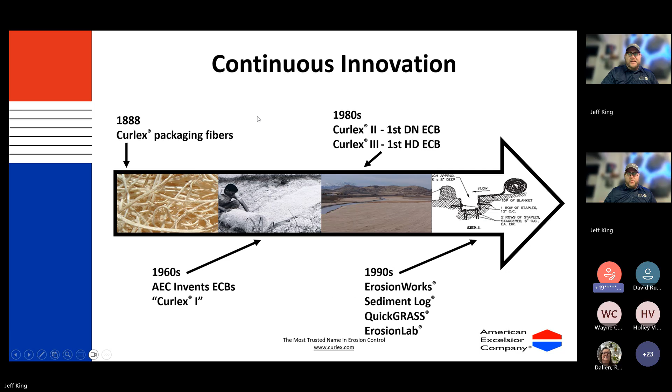Just a little bit about our company. Our company started in 1888. We were a packaging fiber company, the Curlex wood fiber. In the 1960s, we invented the first rolled erosion control blanket, Curlex 1. I'm not going to go over every one of these, but we did invent the first double net erosion control blanket in the 1980s, and the first heavy duty one. And then most recently, we rolled out a TriNet family of TRMs as well as a high visibility log.

We have locations. Our corporate office is located out of Arlington, Texas, and then we manufacture a full line of straw products as well as wood products, the Curlex wood fiber. Those are manufactured in Rice Lake, Wisconsin. And then we have, and those are the Green Stars.

And then the Green Star in Ohio and Alabama, that is where all of our straw-based products are made, so like single net straw, double net, straw coconut, things like that.

The reason why I wanted to mention this is because I've done the fiber type presentation before, but when we're talking about the evaluation of the fiber types and how they perform, I'm coming at this from an angle of we actually manufacture all of this type of stuff. So I'm not just going to sit here and say one is better because I don't have access to or manufacture the others. These are factual things based on the performance of the fiber. So I just wanted to make sure I point that out.

We do have the only large-scale testing. We're the only manufacturer, I believe, in North America that has a large-scale ASTM testing facility up in Rice Lake, Wisconsin. We can do channel and slope analysis as well as some other sediment device things up there as well.

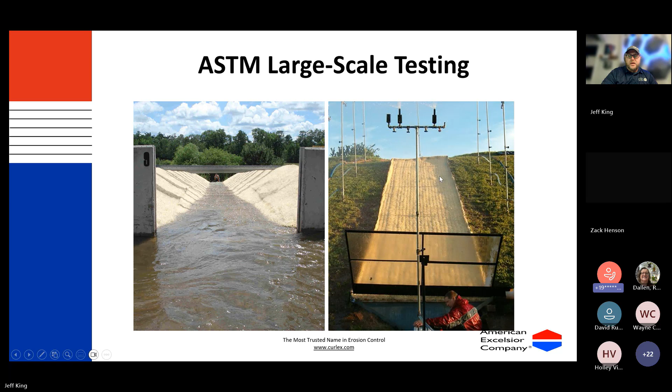Just to give you an idea of what some of the large-scale testing looks like, over here on the left is large-scale testing in one of our flumes, and then we've got rainfall testing over here on the right with the risers and an Excelsior blanket there. We've hosted visitors from 35 different countries from around the world at different events up there at the lab.

Just like other manufacturers, we have tools that can make your job easier if you're a designer or if you're an inspector and you want to make sure that the BMPs have been installed properly. We have a technical support library that's going to have the specifications, CAD details, what the staple patterns are, things like that. We have a YouTube channel that's going to have different videos. Some of the videos you'll see in these presentations are on the YouTube channel.

We also have a design software that will do free rainfall and channel erosion analysis. And inside that software, it's going to have a lot of the things that are in our technical library, like these CAD details and things like that. We want to make your job a little bit easier.

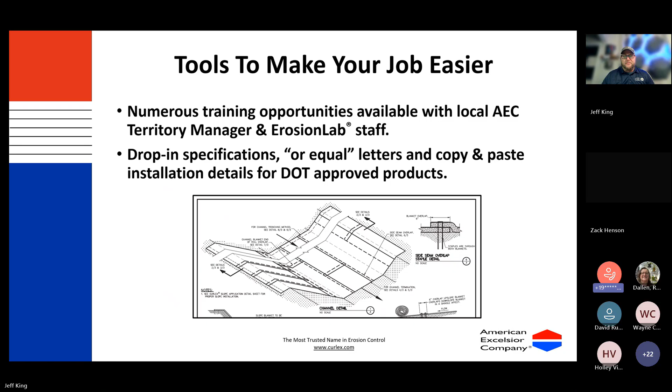So we offer numerous training opportunities, and we're fortunate enough to be able to work with organizations like COSWA, the IECA, and then we also do our own thing as well out in the different markets, whether that be with me, the territory manager, or we have some roadshow things where we'll bring some of our staff from the erosion lab down. We offer or-equal letters and then copy and paste installation details for your DOT-approved products.

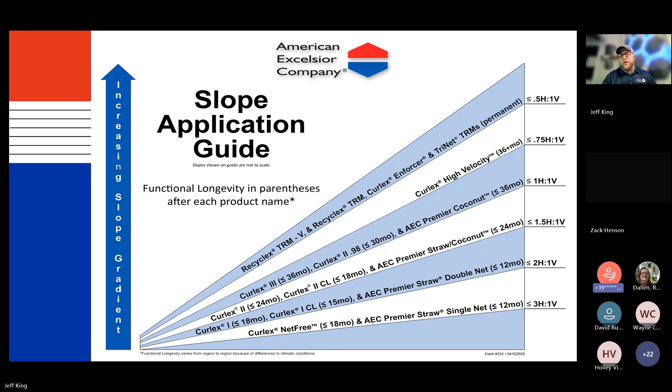One of the resources that we offer is a slope application guide, because when you're looking at a project, two of the things that you need to consider are, one, how long you want the product to last, and two, what the slope gradient is, so how steep the slope is. Other manufacturers will have similar documents where they'll have their products based on product longevity as well as the slope gradient like you see here. And we'll do that for both channels and slopes.

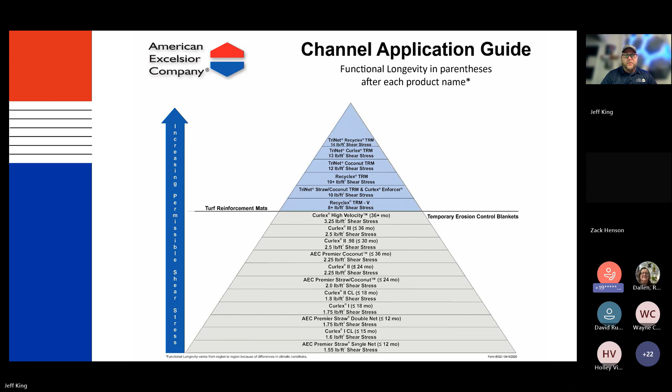The channels are going to look a little bit different because those are going to be based off of longevity and then what your shear stress requirements are. You'll see here at the bottom, you've got a single net straw product that's like 12 months longevity and can only do 1.55 pounds of shear stress. And then up towards the top is where your synthetic products are going to be, where those are going to be permanent longevity with like 14 pounds of shear stress per square foot.

So now we'll get into the project, the Pikeview Quarry, and some of the history of this project. It's located in the Rocky Mountains just outside of Colorado Springs. It began operations around 1903, and then they closed it in 2018. So after 115 years of service, they closed it down. An interesting thing is they actually supplied half of the limestone to build the city, plus the limestone for the concrete used to construct the nearby United States Air Force Academy.

The nickname a lot of the locals gave this area is the Scar, because the mountain is scarred, as it was before the reclamation project. Since closing, one of the big priorities of the owner is stabilizing the slopes and then revegetating the landscape. I actually got to sit in. I wasn't on the roundtable because they didn't have the manufacturers, but last week I was at an event in Pueblo, Colorado, and they had the project owner.

They had two contractors that worked on the project, and they had the Colorado Department of Natural Resources Mining Division person there, as well as the representative from the city of Colorado Springs, and then the distributor that actually worked hand in hand with all the parties involved to get the project designed and going.

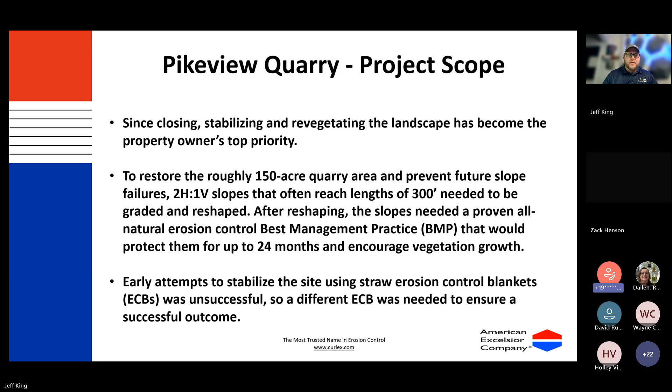Early attempts to stabilize the site, they tried to use straw erosion control blankets, and that was unsuccessful. So what they realized was they needed to try a different approach and a different erosion control blanket to get that successful outcome. The fiber that they ultimately ended up using was the Curlex wood fiber. One of the benefits of it is it's naturally seed-free. Unfortunately, straw can contain weed seeds.

Curlex wood fibers are going to expand when they get wet, and I'll be able to show you an example of that. And they conform to the soil irregularities. One of the great benefits of the aspen wood fiber in general is it holds its weight in moisture. So when it gets wet, it'll provide this greenhouse effect, which is going to help protect your seed bed as well as hasten your vegetation.

Straw is essentially a flat and hollow fiber. It's an agricultural byproduct. So it's a non-engineered fiber compared to different wood fibers. And these fibers, specifically for the Curlex blanket, are cut to be a certain size to meet that optimal performance. As mentioned, straw is an agricultural byproduct.

So the plan. What they planned on using was a combination of drill seeding, some biotic soil media, and fertilizer to revitalize that quarry and help aid in the vegetation growth on the slopes. What they ended up using was over 422,000 square yards of the Curlex double net Excelsior blanket with jute netting.

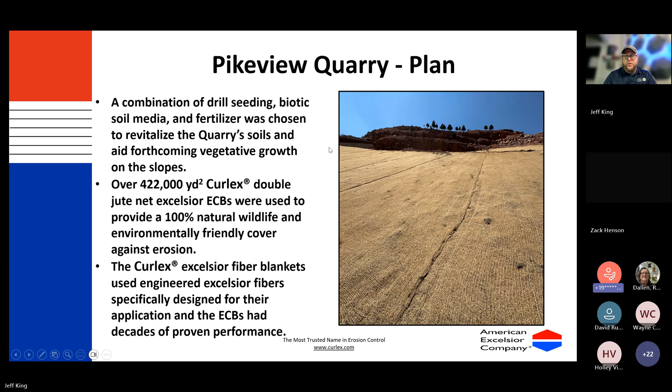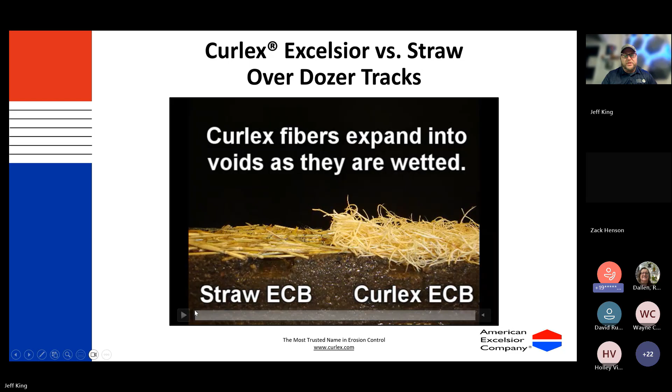We get both wet, and you'll see here, as the time-lapse video shows, the Excelsior fiber blanket actually expands down into that track void. So there's no weak spot underneath that particular fiber. Whereas the straw fiber, when it gets wet, doesn't retain moisture like that, so it just stays flat and hollow. So you still have that void underneath the blanket.

And this is actually one of our flumes. We have our straw blanket installed to manufacturer's recommendations as far as staple patterns, amount of staples, those kind of things. And it's going to show you a comparison of running water down this flume with the straw blanket installed to those recommendations, as well as the Excelsior blanket installed to manufacturer's recommendations as well.

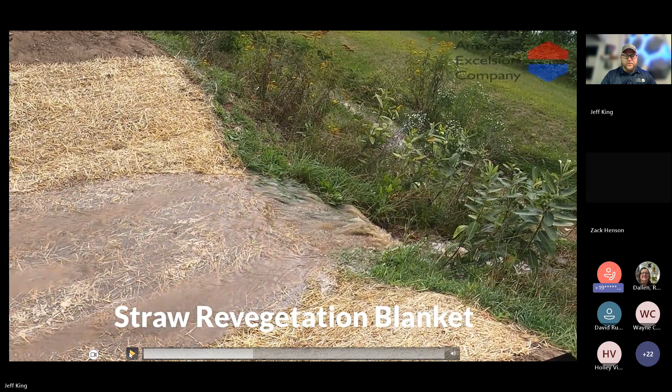So what you'll see here is the water coming down the flume. Those fibers, because they're flat and hollow, rise up. And because they're rising up, your blanket doesn't have that intimate contact with the soil. So you're having erosion underneath your blanket in this particular application. And because of that, you'll see that the runoff here is actually brown. And that's obviously not a result that we want, right?

Oh, let me go back. Sorry.

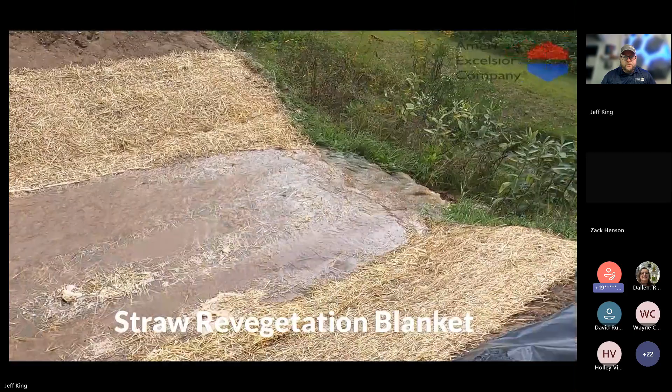Now you'll see the same water at the same flow rate going over the Excelsior blanket. This blanket, when it gets wet, these fibers curl and interlock with one another, and then they Velcro down to the soil.

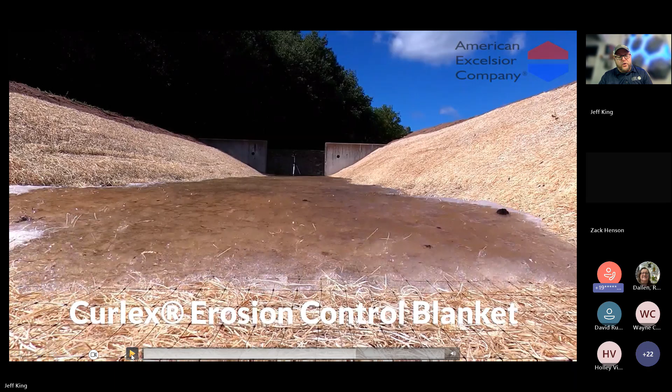In other presentations, you've heard me talk about specific gravity. From a value standpoint, anything with a specific gravity under 1 means it will float. So that can be straw fibers, some wood fibers, poly-based fibers for your TRMs, those kind of things. This is actually not floating, not because it has a specific gravity over 1, but because of the mechanical function of the actual fiber type and it Velcroing down to the soil. And because it's not floating, you can see a difference in the runoff. It's actually crystal clear.

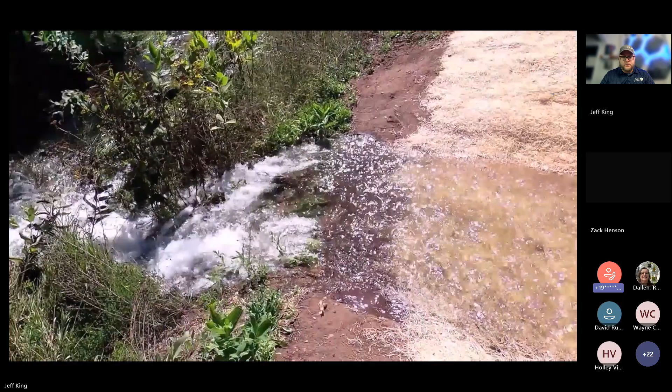And that's the kind of result that you want. Not all Excelsior is going to be created equal. There are Excelsior blankets that are made with different fiber types other than the aspen wood fiber. The benefit of the aspen wood fiber is that expansion that I showed you earlier. It will puff up, it'll expand and contract and give you that higher Manning's N or roughness.

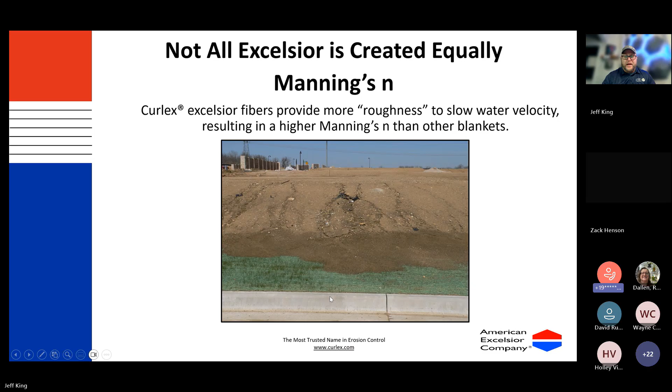And what that allows it to do also is if you have sheet flow, you can see here, like this particular site here, they had a rain event, you've got your rills here and you've got a lot of sediment starting to run down, but because of the roughness factor of that blanket, it actually traps the sediment about halfway in rather than going down out into the street.

I mentioned the biodegradable netting. So standard erosion blankets like ECBs, ours and other manufacturers included, typically come with a polypropylene plastic netting. For this particular project, they wanted to go with a biodegradable option. And a lot of areas are actually starting to choose that over the plastic net options anyway, just due to microplastics becoming more and more of an issue, things like that. So all of the manufacturers are going to have a biodegradable net option.

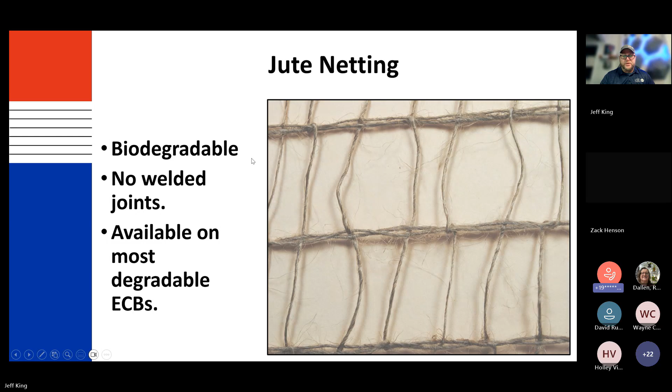It does have a cotton stitching. So these blankets are what we call stitch bonded. For an erosion blanket, it can be for either a single or a double net, and this one was actually a double net. So what that means is you have your netting on top, then you have your fiber matrix, then you have your stitching that goes through the blanket, kind of helps hold everything together, and then you have another layer of netting that goes on the bottom. So that's what we call stitch bonded.

And in order for a blanket to be considered 100% biodegradable, every component of that blanket needs to be biodegradable, and that includes the stitching. These blankets actually have a cotton stitching, which is biodegradable. So you have your netting that's biodegradable, you have your fiber matrix that's biodegradable, and then you have your stitching that's biodegradable as well.

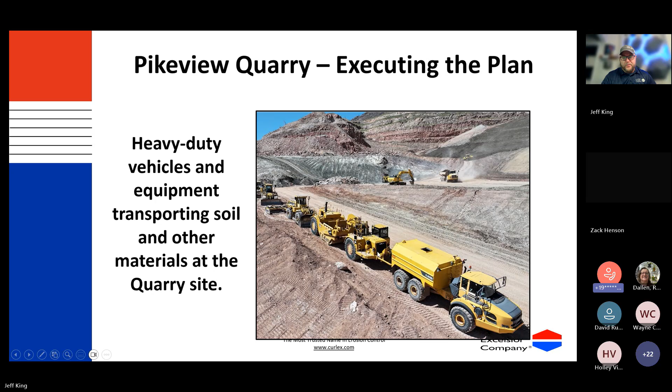Executing the plan, they had to use a ton of heavy-duty vehicles and equipment transporting a lot of soil that they actually brought in from other places. In fact, the owner was talking last week about how they allowed other construction sites to bring their fill dirt and just dump it there because they knew they were going to have to use it. So this is a look at just some of the heavy equipment that was used on this project.

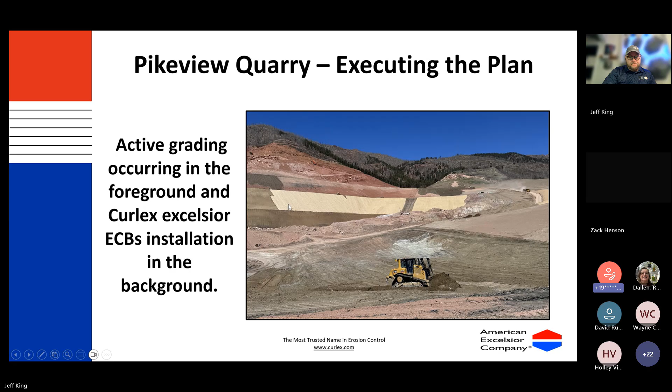And I will also point out, I don't believe they had any safety issues or incidents the entire time they were installing these products, ours and others on this project, because they were pretty dialed in on making sure that their crews were safe and were able to install this in a timely manner, but being safe while doing it. These were 16-foot rolls that they used, and they used skid steers.

And then here's the result. This is the view of the Quarry site once all of the erosion control blankets were installed and it had been completed. And like I said, they tried a year before this to use a straw-based product, and they didn't have any luck with the vegetation. And you can see here, this hadn't been installed. I think from the time they started the installation on this to when they finished, I don't think it was more than a couple months.

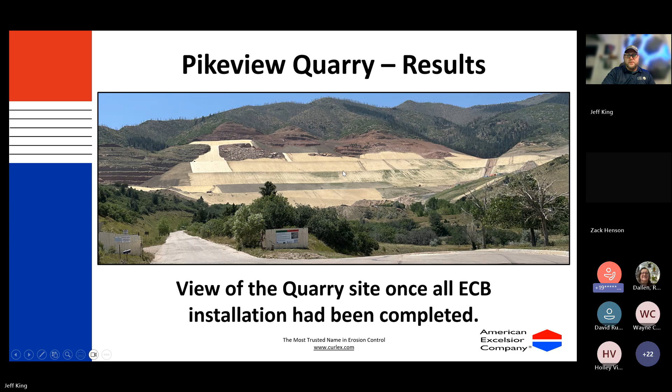Establishing vegetation in Colorado is going to be a lot different than establishing vegetation in Oklahoma or Texas, right? Like, it's not going to be as fast just because of the humidity we have here versus they have an arid environment there. So this vegetation they started establishing inside of just a couple months, and it's starting to grow. More emerging vegetation. I mean, gosh, just look at the scope though. So you see the guy over here on the left, and how he looks like an ant compared to the size of this slope.

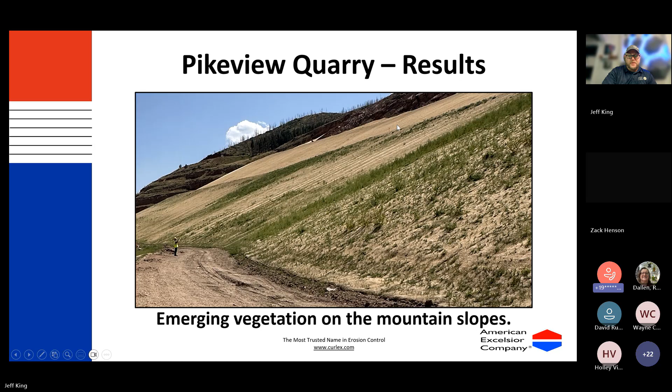There were actually pronghorns that were on site as well, and other types of wildlife. And that's why that netting actually being the biodegradable option was important. So, again, we didn't have animal entanglements because also, I'll point out, this was a very high profile project. They were doing news stories about this both before and during the project. And so there was a lot of community feedback and things like that on it. So obviously, if you're an owner of a project, you don't want wildlife entanglement anyway, but you certainly don't want wildlife entanglement and then being on the news for it. So that was the other reason why they chose the biodegradable option on that netting as well.

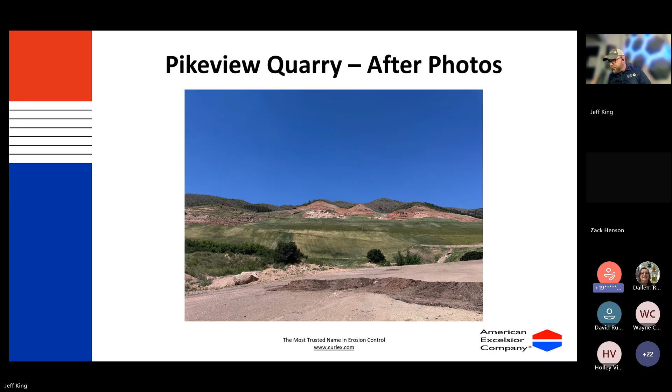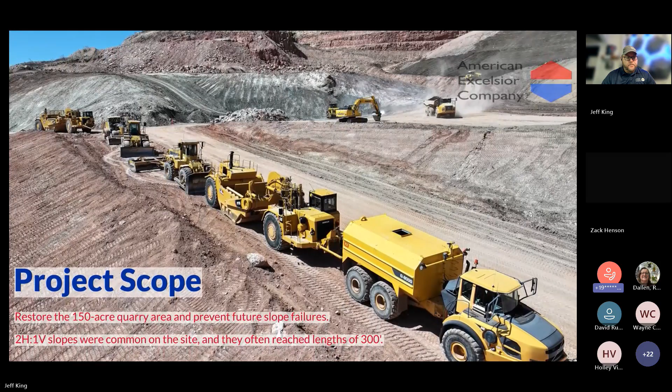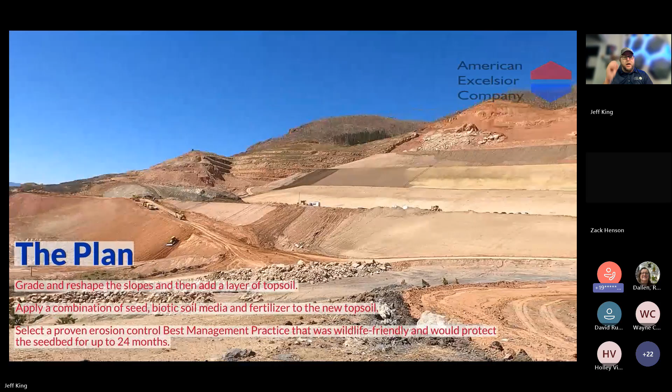Kind of recapping some of what we've already gone over. Yeah, I'll also say this is the biggest project that I've ever been a part of, as far as that goes. I've never done one that's had that many yards of any kind of ECB put on it. And I've done some pipeline projects, but this one I think has got to be the biggest one I've ever done.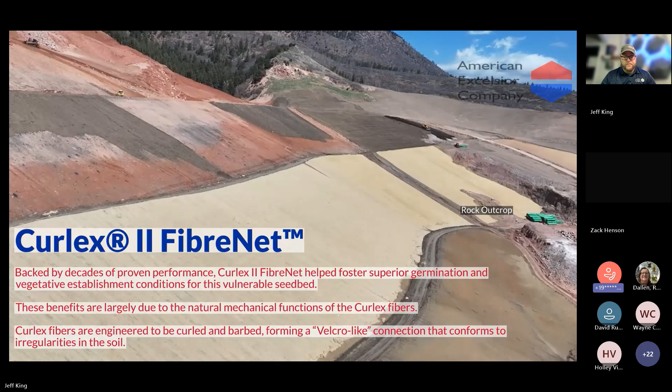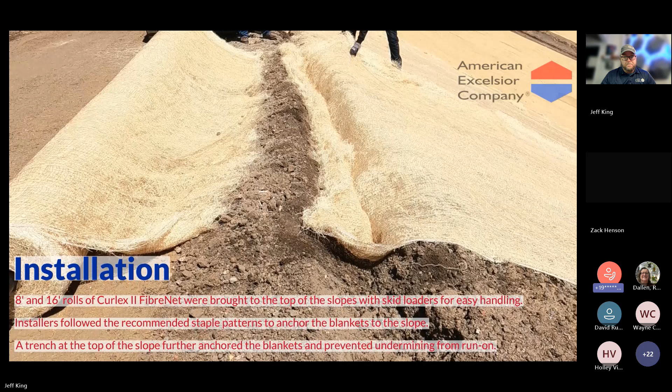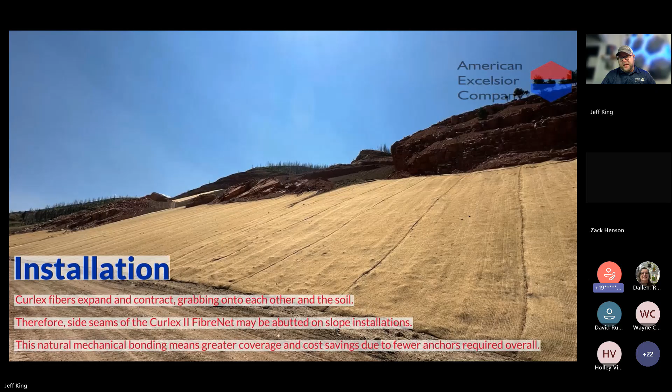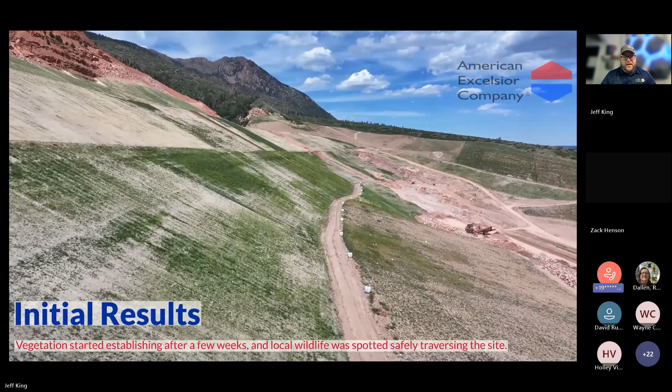Give you an up close look of what the installation looks like with the trenching and things like that. Other thing I'll also note, the Aspen Excelsior blankets, you do not have to overlap. So you can see these are butted up against each other because, again, when they get wet, those fibers will interlock with one another. And this is just a drone footage look of the initial results of that vegetation starting to come in.

Installation tips for really any project. You want to make sure you have good soil conditions. You want to prepare the area that you are actually installing the ECB on. So you want to remove any kind of rocks, clods, or any kind of big sticks or roots or anything like that. You want to make sure that soil is as flat as possible. You want to also use the right seed mix too, right? You want to use the optimal seed mix for whatever your area is and whatever your native seed blends are. You want to also select the right soil amendments depending on what your conditions are.

And something I'll also point out, the reason this project succeeded wasn't just because of the blanket. There actually was a biotic soil media that was used that was crucial to making sure that we can actually get vegetation. Because the vegetation, that's the whole point, right? That's why you do these types of projects, because you want to revegetate and stabilize. And honestly, I don't believe that it could have been done in as efficient of a manner without that soil media. So I wanted to make sure I point that out.

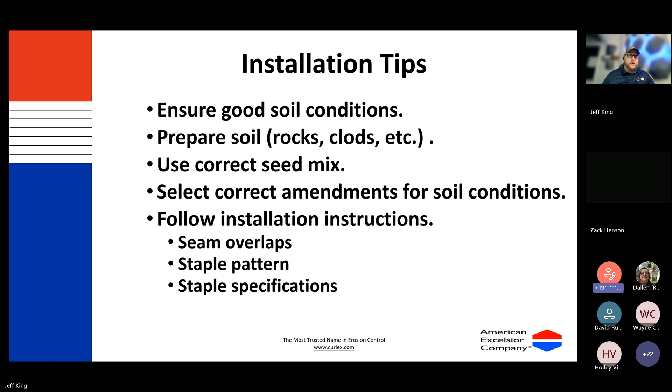Staple specifications. Some require a different gauge metal, or a different length, or for certain turf reinforcement mats, instead of using a U-shaped sod pin, you might want to use a helical twist pin. And if you use that, you want to use the right one for the right type of soil, whether you've got a cohesive soil or fairly loose soil.

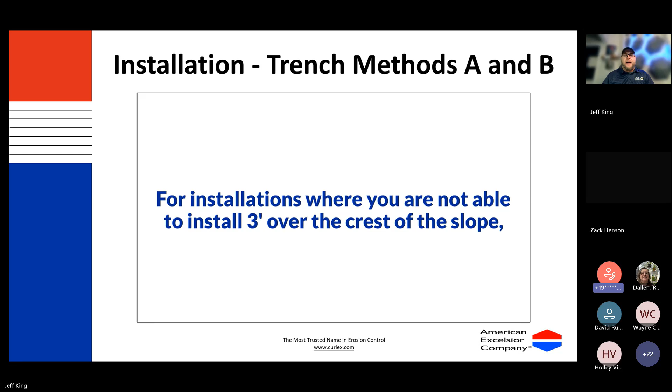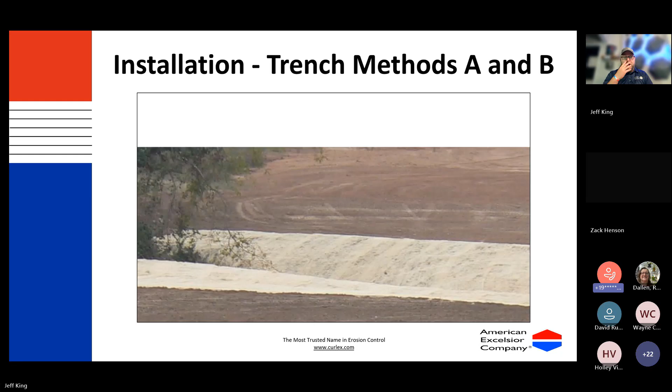You want to make sure you do your trenching at the tops of your slopes. This gives you an idea what it looks like to install one of these types of products. You really want to be at least 3 feet over the top of the slope. Yep, and make sure you use your trenching. Again, till and rake the soil as needed. Make sure you remove large obstructions. Make sure you've already added your seed and then your soil amendments. And we'll look at trench method A.

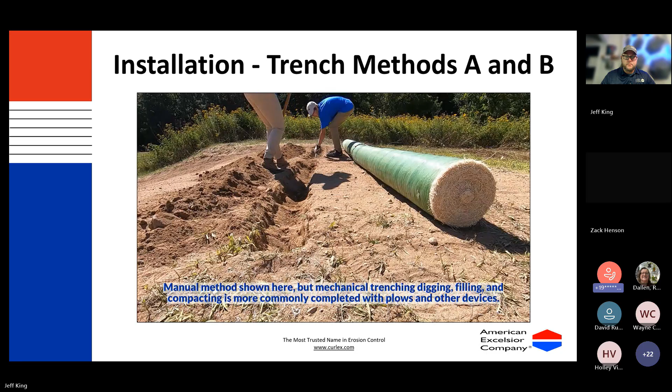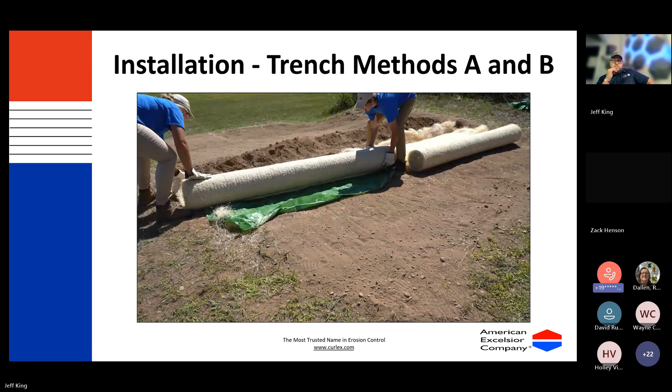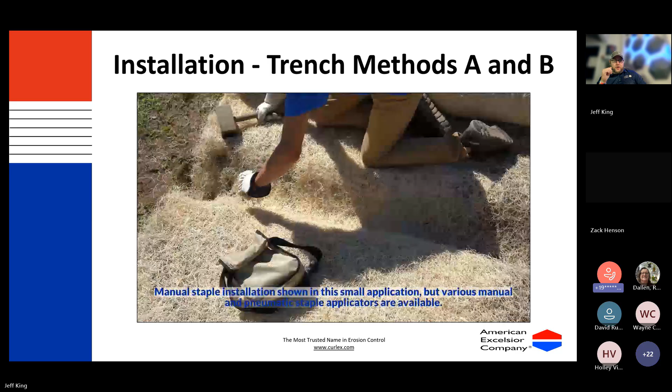So you want to make sure you place the soil down slope. You can also use mechanical methods for trenching as well. You want to pull the flap under the roll and place it in the trench, and then set the remaining roll on the other side. And again, if it's a single net product, make sure that netting is going to be on top. And then you'll staple. You want to make sure you put a good amount of staples in your trench.

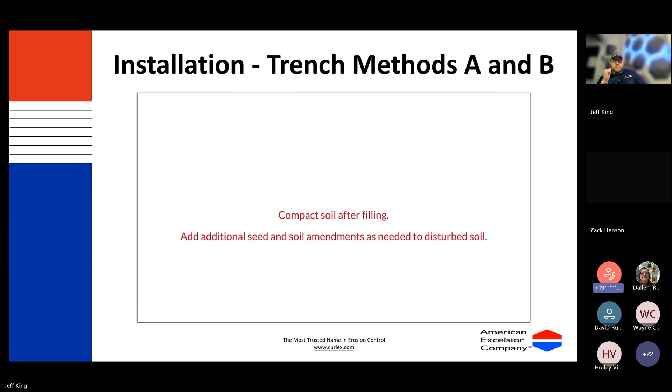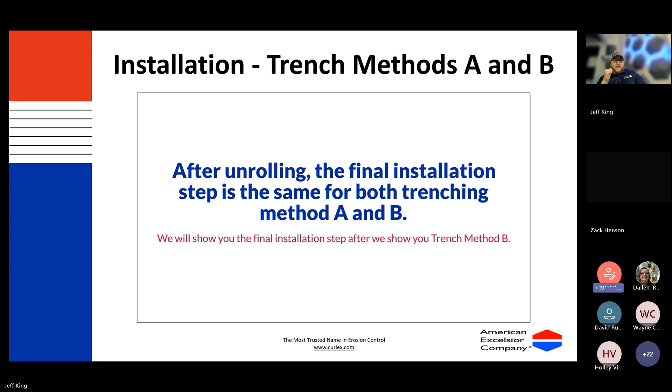And then you'll soil fill that, and then just pack that down if you can. And then you're going to unroll your blanket. See how clean that looks at the top already? That just looks clean. Yeah, and the final installation step is the same trenching and stapling method. And then you've got trench method B.

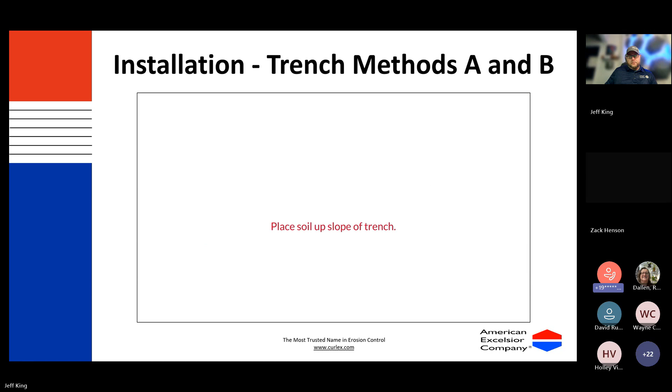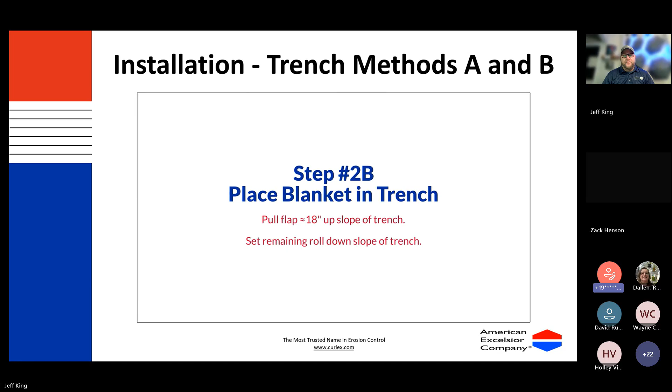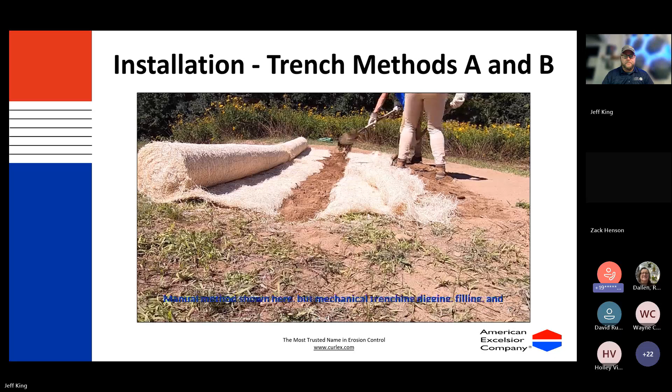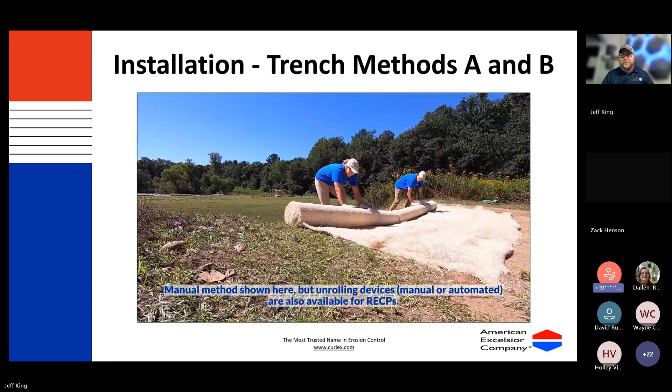Pull the flap 18 inches up slope of the trench. Then you'll push it down in here. And again, make sure you add a good amount of staples, so that it stays nice and snug in there. You'll soil fill it. Then you'll see here they pulled that extra section back over the top of the slope, and then they will have stapled that down as well.

Again, I can't stress how important it is to follow the staple pattern and the installation guidelines when installing this BMP or any other BMP for that matter. And I guess I went a little fast on that one. Anybody have any questions or anything you wanted to point out from what you saw?

Right. So Wayne had a couple of questions. He wanted to know if all the plants used in that case study were native. Yeah, they would have definitely been native. And then he asks, what is the biotic soil mix? Was compost a part of that? I'm not entirely sure on the exact components of it, but it was a Profile product for sure. I'm not sure what their mix consists of, but I do know that they did use their, I believe it's called Biotic Earth. Okay, cool. Thanks. So that's all our questions this time.

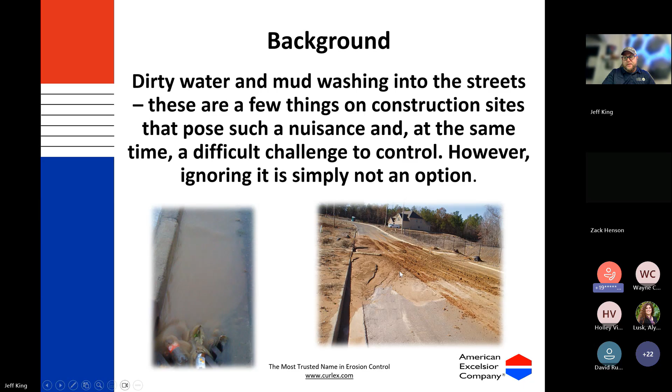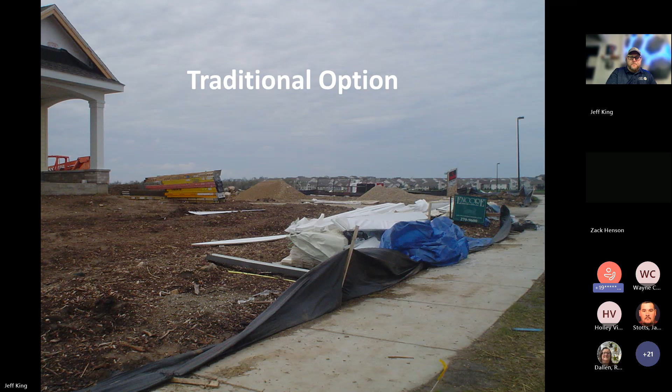So here are two examples. You've got sediment-laden water here and debris going towards a storm drain. You got a ton of sediment out in the street. Obviously, you cannot have that. So the traditional option to try to control that is the silt fence, whether it be plain silt fence or wireback silt fence, depending on what your requirements are. Some of the different things you'll see in the field when silt fence is used. It's a damming device. It gives you that kind of result.

Unfortunately, this is something that we've all seen out in the field. How this happens is you have trades that come on and off of these job sites, right? Whether it's the electrical, the plumbing, or the bricklayers or whatever. I'm speaking in terms of housing construction, and they don't think about clean water or SWPPP plans or anything like that. So they run over the silt fence, and this is the type of thing that you get on these sites. You see here on top, you've got the sediment on top. You have more in the street, so that's going to be going into the storm drain.

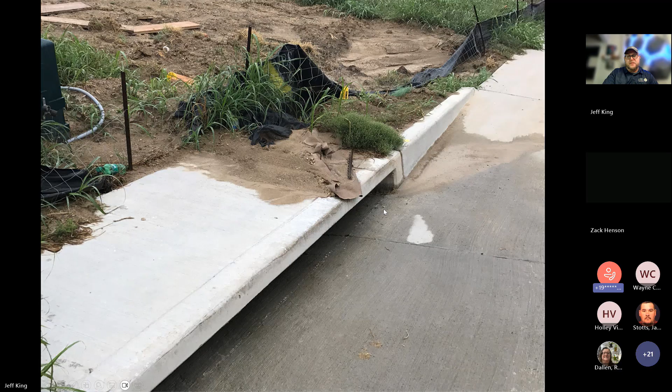So I'm going to show you the innovative option for controlling your site sediment. This is called Curlex Silt Trap. It gives you an idea of what a site looks like with and without Silt Trap. On the left, your streets are clean. That green looks really pretty. But on the other side, you've got sediment running out into the streets, which is going to be running into the storm drains. It's just not a good look.

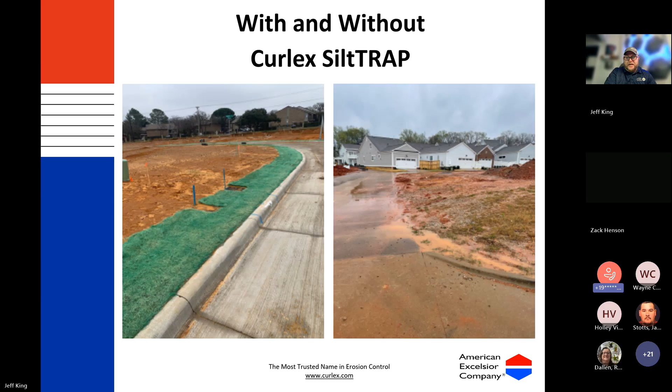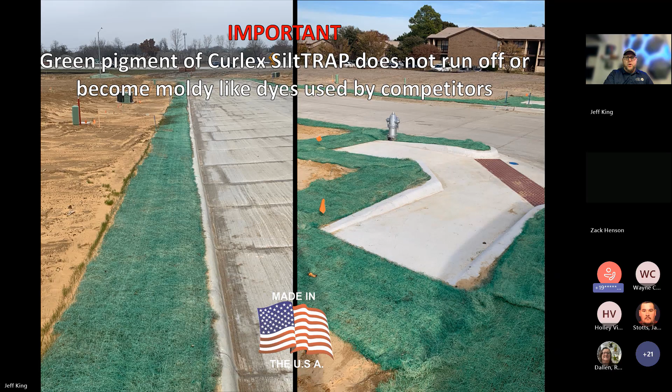One of the things that's great about this is it's a low profile device. It does have a high performance capability, and that green, as I mentioned, looks really good on your job site. So what this will allow you to do is have the performance, stay in compliance, and avoid those fines. And it typically will save you money compared to a lot of the traditional options for sediment control. We use a green pigment, and it does not run off or become moldy like some dyes can do.

Just to show you what it looks like. It's aesthetically pleasing. That green, like I said, looks good. Gives you that grass look.

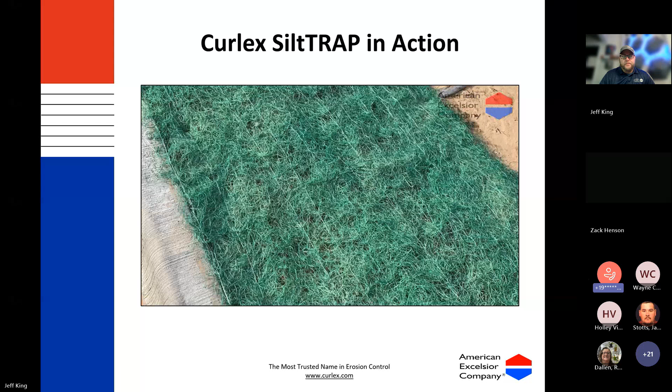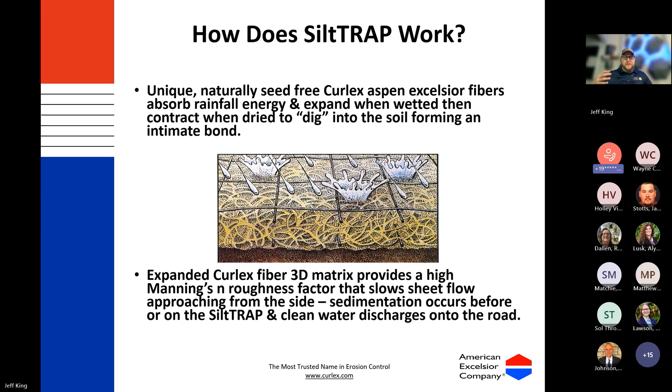So how does it work? Well, one, these fibers are naturally seed-free. They're Curlex aspen wood fibers. They help absorb that rainfall energy. And as I showed you in that video over the track void, and you'll see a couple of the same videos in this one, the fibers will puff up and expand when they're wet, and they'll contract when they're dry and dig into the soil. And that 3D fiber matrix gives you a higher roughness factor that's going to slow down that sheet flow approaching from the side.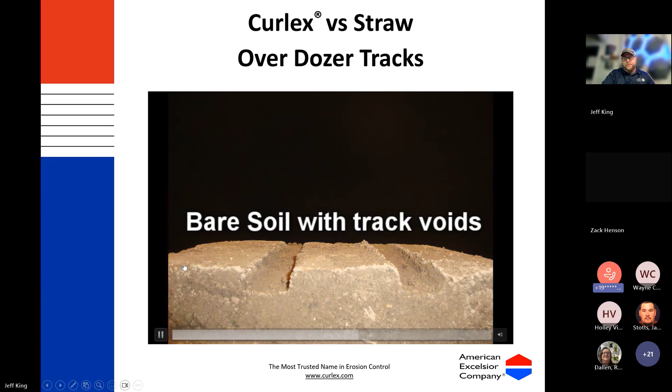So you can see how it got wet and expanded down in that track void. We already saw that, so we won't spend a lot of time on that. Again, it gives you that roughness, and roughness is going to equal performance.

They used an 8-foot buffer strip here, but you can see they had a rainfall event. The fibers got wet and expanded, and then the sedimentation started moving off the site, and it was trapped about a third of the way into the blanket, which is what you want. Because what that's going to do is minimize callbacks where you have to have your contractors come out and sweep and clean up.

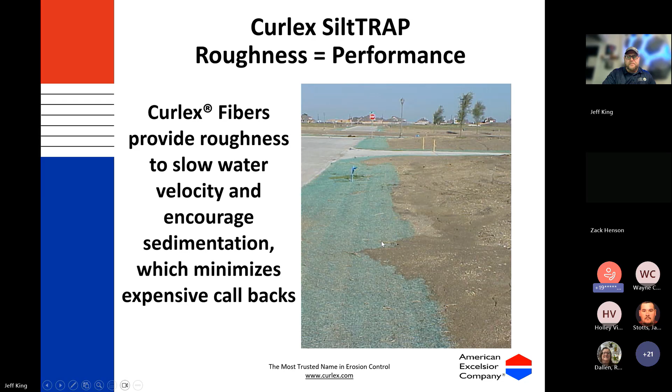It will filter out contaminants from anything from sediment to heavy metals. It will filter out hydrocarbons. And that fiber is actually recognized as a sorbent by the EPA.

This is one of my favorite videos. It's on our YouTube channel. We started making this kind of video around the time of the BP oil spill out in the Gulf of Mexico. I believe that was in the early 2010s, somewhere around there.

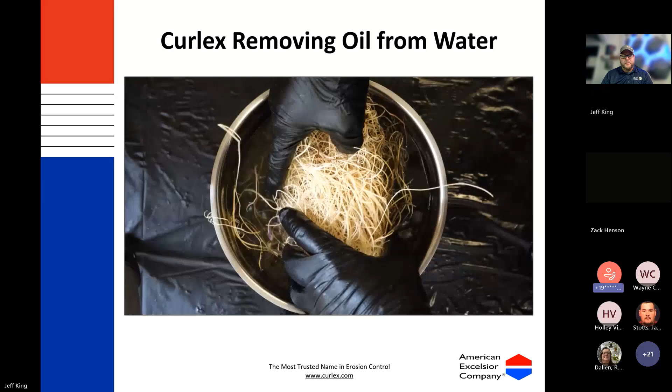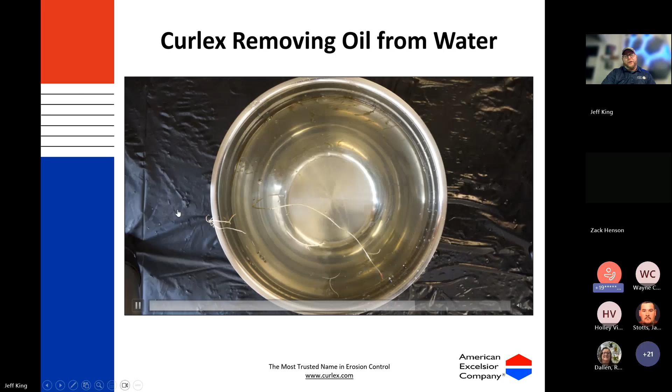You can see here that fiber pulled that oil out of that water. Our straw fiber will not do that. Our straw coconut or our coconut fibers will not do that. Only the aspen wood fiber will do that.

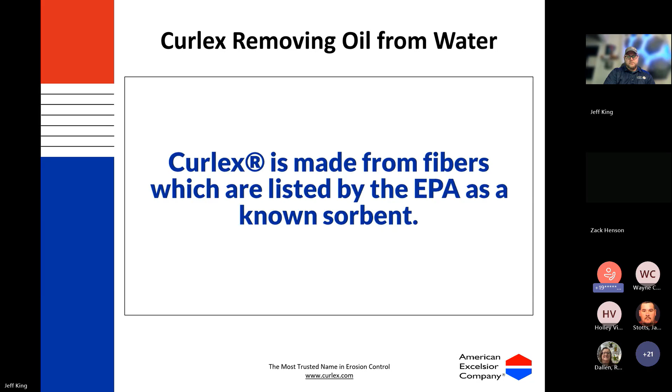Just an idea, I already showed you some of the testing. This is a little bit of a further back view of what the large scale rainfall slope testing looks like. One thing I'll point out is you can see up to 83% of the soil was retained where the blanket was compared to just bare soil.

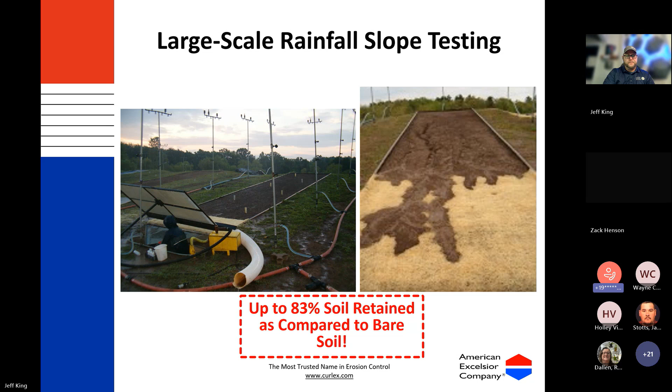Different vegetation options. So in housing, obviously sod is used a ton. You can either sod over the top of it, or you can just leave it be and let whatever vegetation is there grow up, like they did here in this photo.

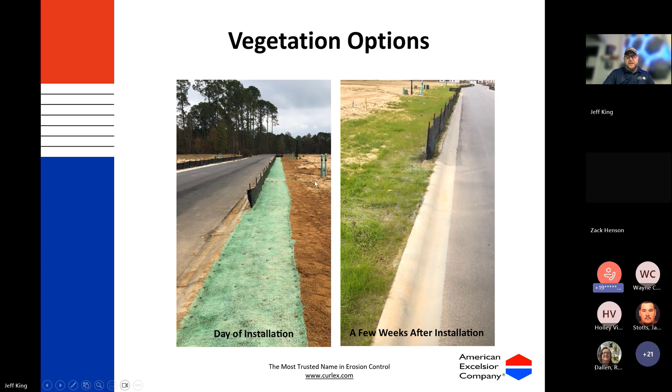The other thing I'll point out too, this was actually a demo site where the developer wanted to see what it would look like with just the SiltTRAP and with the silt fence. You wouldn't normally see these two things working together because that would be a bit of overkill. So just wanted to make sure I pointed that out.

As mentioned, it is lower profile. We saw that silt fence earlier where you can tell that a trade person probably rolled over the top of it, would have had to do that. You can drive over this blanket. I mean, I wouldn't do donuts on it, but you can drive over it.

And the other thing I'll point out too is if this gets damaged, you can actually splice this as well. So you can cut it in two sections and remove the section and then add another section of this type of blanket together, and those fibers will curl and interlock and it'll still perform.

We've got decades of proven success. This application actually started down here in the Metroplex. I'm second generation with our company, and my father was actually one of the people that worked on getting that application up and running and introducing it with the city of McKinney and I believe the EPA. And this has been going since somewhere around the mid-90s to late 90s, if I recall.

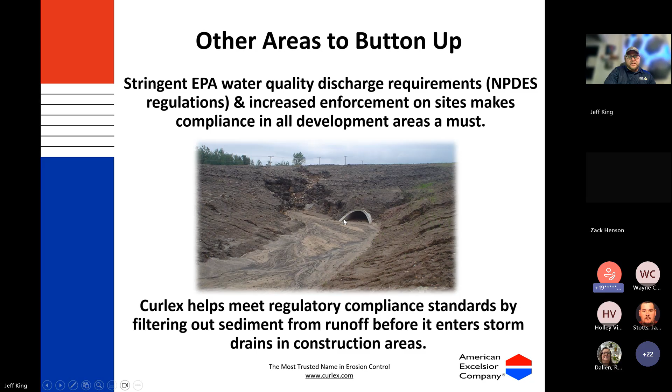Some other areas to button up. The EPA's got some pretty stringent water quality discharge requirements. Obviously, y'all are out trying to enforce. Curlex will help your developers and project owners meet that regulatory compliance standard that y'all have. And then just some other job site photos with that.

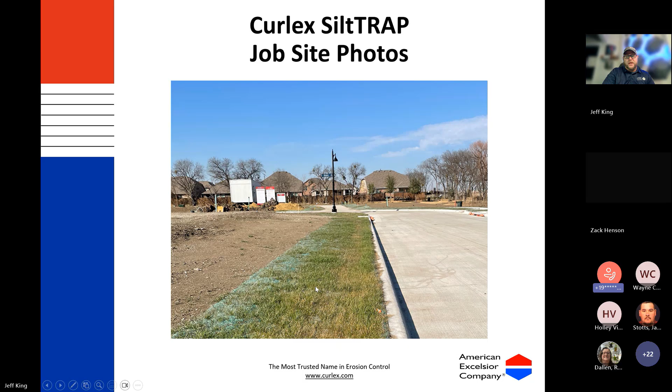You see the vegetation growing up through there. One other thing I'll point out too is because this is a degradable product, you can actually leave it, whereas the silt fence has to be removed and take up space in a local landfill. You don't have to do that with this type of BMP.

I actually took this photo. This is my favorite photo. This is not far from here. This is Little Elm, Texas. I took this photo. This is actually my background wallpaper on my laptop.

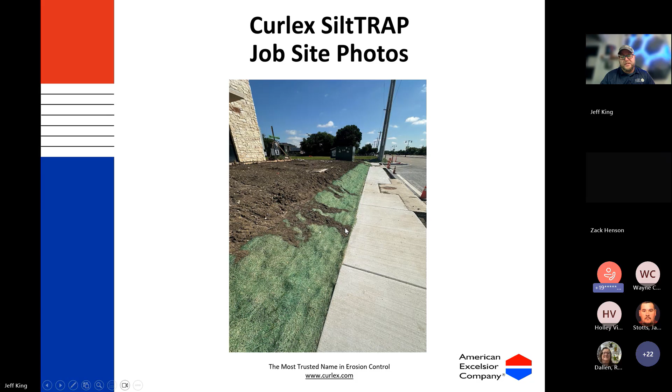I love this photo. So you can see here they've got disturbed soil here. It rained, and then the runoff stopped at the end of the blanket. Got a little further in than that other one, but it still stopped on the blanket nonetheless, and was not out on the sidewalk.

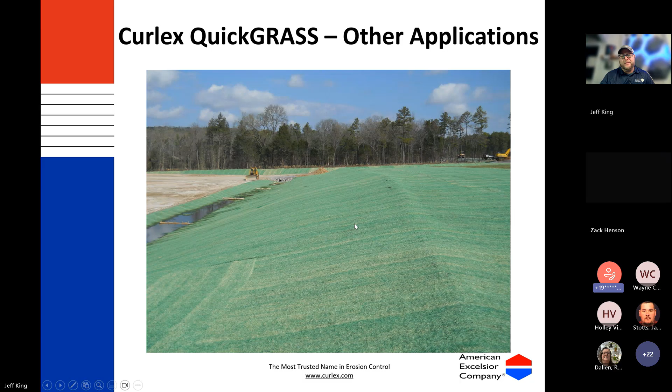Other applications, you can use it for your detention ponds. This one here is an oil pad, just a slope. You can actually use this product in your lower flow channels, but if you're in a higher flow channel, you'd want to line the outsides with it and then put like a TRM down the middle.

And again, as mentioned earlier, we want to be your industry resource, make your job easier. Our tech team can help. We've got all of our guidelines, things like that. We work with industry organizations like the Erosion Control Technology Council, which is basically a group of the manufacturers that all get together and lobby for the industry, but also make sure there's quality assurance standards put forth to make sure y'all have a diverse mix of BMPs.

And then, we work through the International Erosion Control Association too. We're all members of that. And hopefully y'all are all familiar with some of the benefits of joining that organization as well.